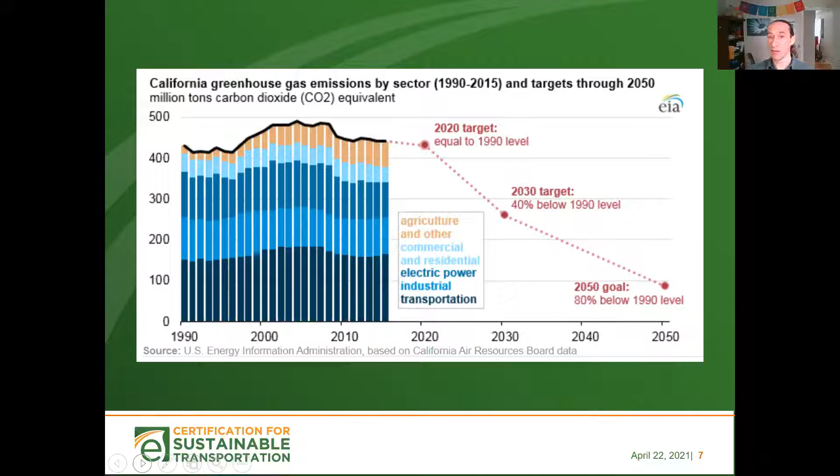California, for better or worse, has very aggressive programs compared to a lot of parts of the world, and compared to the US for sure, for reducing greenhouse gas emissions. And you've got these targets in place, legally. The targets show that 2020 carbon dioxide levels are shooting to be equal to roughly 1990 levels. But then for 2030, 40% below 1990 levels. And by 2050, a goal of 80% below 1990 levels.

To understand how people are going to get there, California's done an analysis of where our greenhouse gas emissions come from. None of these numbers are perfect, but they're pretty good assumptions. 40% of all greenhouse gas emissions in California come from transportation, with about 28% of that coming from light and medium duty passenger transportation and 8% from heavy duty vehicles. Probably about half of that is going to come from private sector motor coaches as well as public transit—heavy duty passenger transportation vehicles.

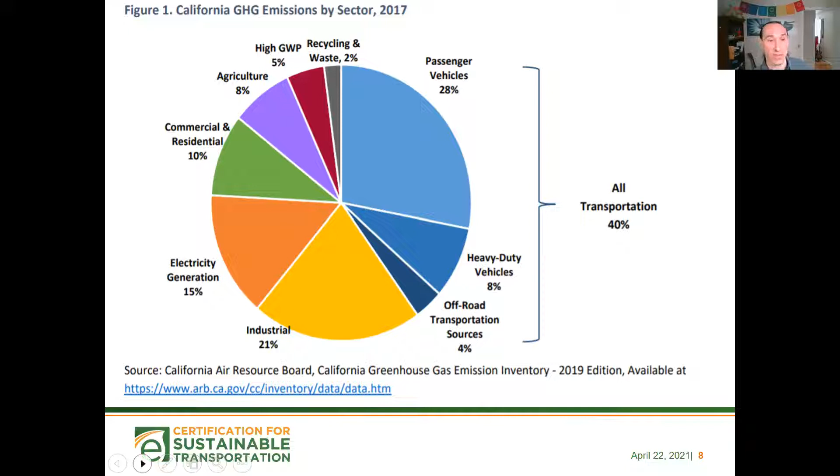The ways folks are looking at improving efficiency per unit of production or consumption for transportation is basically getting people to travel less—avoiding trips, modal shifts. That means getting people, instead of taking their cars, to use a different form of transportation: maybe skateboarding, biking, taking a Lime scooter, or getting on the bus. And I think the real moral of today's story, as we walk through this in a few minutes, is that buses are a really legitimate option that we could defend. The public doesn't necessarily relate buses and green together, but there's a profound connection and a really powerful story to tell about buses being part of the solution, and especially them not being part of the problem.

Having more efficient vehicles and new technologies, and electrification—if we can get that up to scale, with better batteries and charging stations, and the energy coming from clean green sources—that's certainly one way to get there as well, especially if those fuels are carbon neutral or carbon negative, and they're low carbon and energy efficient.

And ways to improve efficiency include reducing congestion on the road. You all know from running bus and motor coach companies, your vehicles get better fuel economy when they're driving down the road versus being stuck in stop and go traffic. So when you have less congestion, your whole system's moving more efficiently. You might have the same number of vehicles on the road, but without that congestion, if you've got good systems, you might boost your efficiency by 10, 15, 20%.

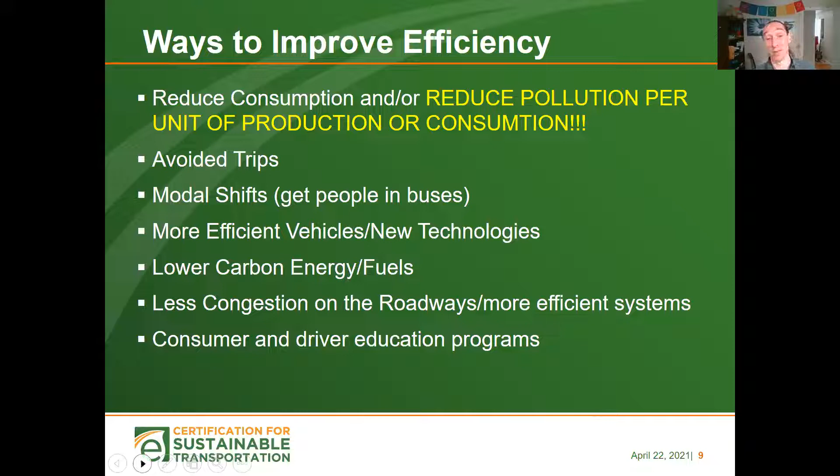California has these aggressive goals, including SB 32's goal of reducing emissions 40% below 1990 levels by 2030. You've got SB 350 and 100, where it says 60% of all electricity from renewable sources by 2030, and 100% carbon-free sources by 2045. That basically means shifting away from coal-burning power plants, if you still get electricity from those, or diesel-burning power plants, and moving towards wind, solar, electric, and other technologies out there. And there's some cool stuff going on with carbon capture, so maybe there will be a way to balance that out in the future.

And you've also got a rule, sustainable transportation planning, SB 375. Now, taking ourselves out of California, you've also got stuff happening nationally and internationally.

And since this is Earth Day and it's global, I figured I'd give a shout out to what's happening on that larger scale. You've got something called the United Nations Framework Convention on Climate Change, that Paris Accord, as controversial as that is in a lot of circles. You've got 190 countries that have made commitments. We know some put it on paper and may not follow through, but we also know other groups are really working hard at following through, and Europe's probably leading the charge on implementing and putting their plans into action.

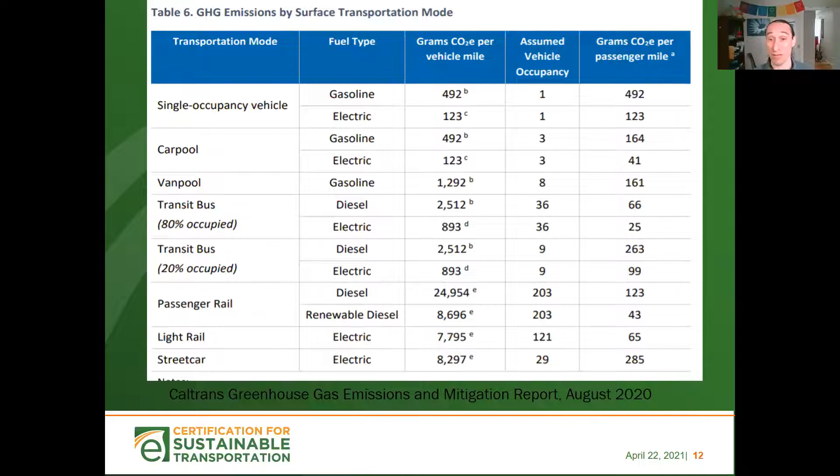If you got a bunch of people in a similar car, you're moving them at 164. An electric vehicle, a single occupancy person in California, these are CARB numbers, it's about 123 grams of CO2 per passenger mile. And if you go down this chart here, you can see different categories, but funny enough, motor coaches aren't listed here.

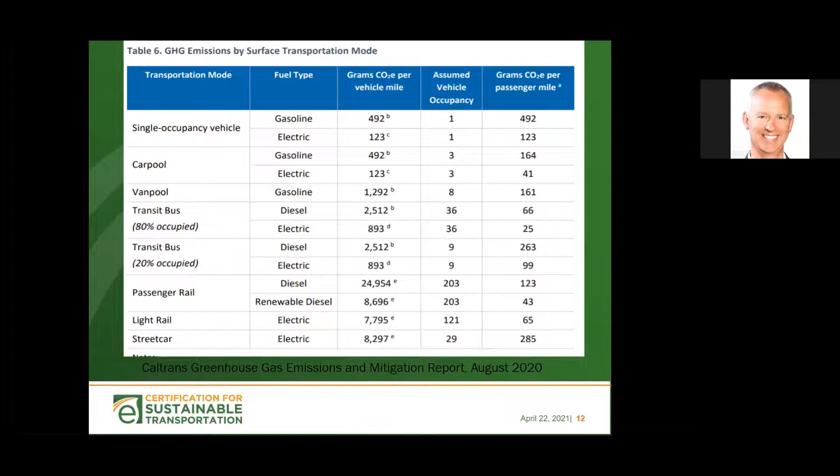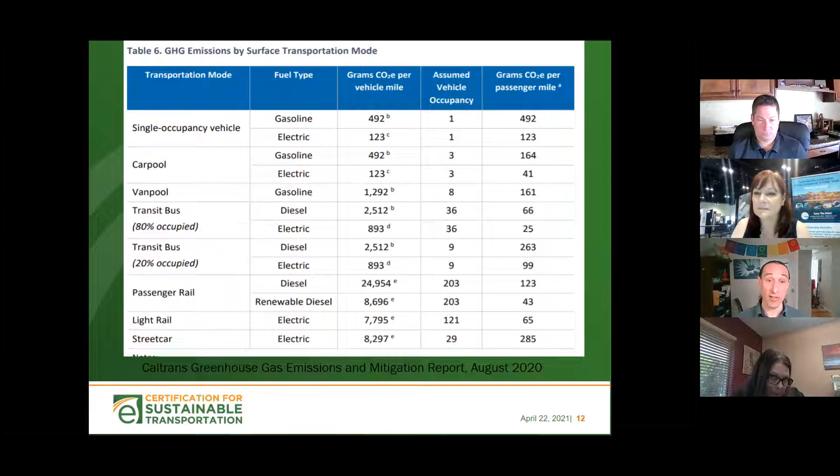You've got an estimate for 80% occupied transit buses. That doesn't happen a ton. In some areas of the country, you get that a lot, but on average, you probably don't. Then you've got estimates here for 20% full, whether you're using diesel or electric, and passenger rail. But buses and motor coaches, it's a big industry, but it's relatively small compared to these folks.

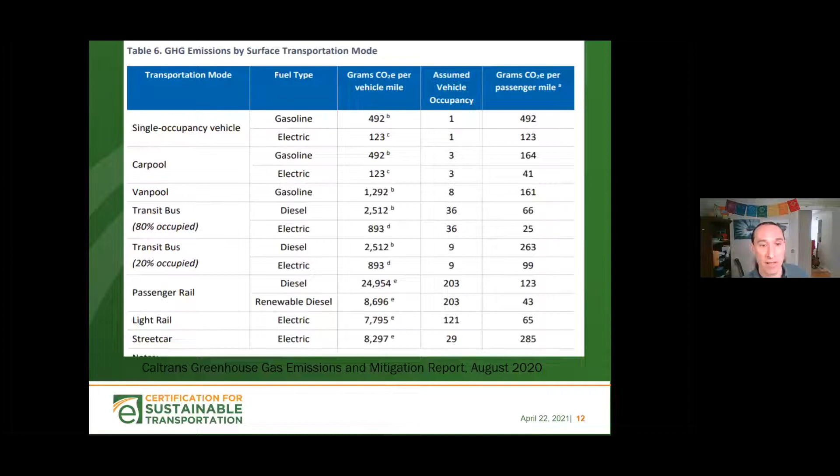And you've never broken these numbers out individually in the state of California. So in trying to figure that out, I wound up doing some math and looking at the average single occupancy vehicle in California in 2017. That was 411 before you take into consideration some other factors. It was really closer to that 490 in the previous slide.

In the US, ground transportation, we move people at an average of 274 grams of CO2 per passenger mile. Sorry if I'm losing folks with numbers and math here, we can get back to any of this stuff if you'd like.

But looking at ABA numbers, when you think about it, you probably have an average of around 40 people on your bus at any moment. You got 55 seats, but it's rarely that you're 100% full all the time. But you're probably not running empty buses. On average, buses and motor coaches, you have around 40 people.

ABA has done the math on this, with the number of people you have in the bus and the average MPG. So let's say your average MPG is about 6 miles a gallon. You multiply your 40 times 6, you get your passenger miles per gallon of fuel.

Now, if you actually do some math on that and calculate how much grams of CO2 are in each gallon of fuel, using the ABA numbers for average passenger miles per gallon, you emit about 38 grams of CO2 for each gallon, for each passenger mile of fuel.

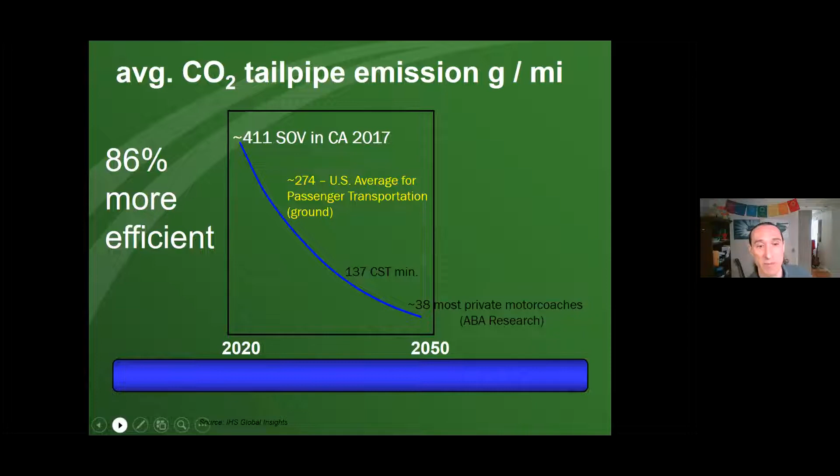Now, if we want to be more specific and actually make comparisons in California to that chart I put up previously, that previous chart actually used a slightly different, what we call emissions factor. It didn't just talk about the fuel being burned out of the tailpipe, it also included something called life cycle cost or downstream costs. That's basically how much carbon do you put in the atmosphere extracting the fuel, transporting the fuel, storing the fuel, getting it into your tanks.

About 51 grams of CO2 equivalent, or greenhouse gases, are released into the atmosphere for every passenger mile traveled in a motor coach. So if motor coaches came up on this chart, you are doing better than every single category except for an 80% full electrified commuter vehicle, transit bus, or renewable diesel passenger rail.

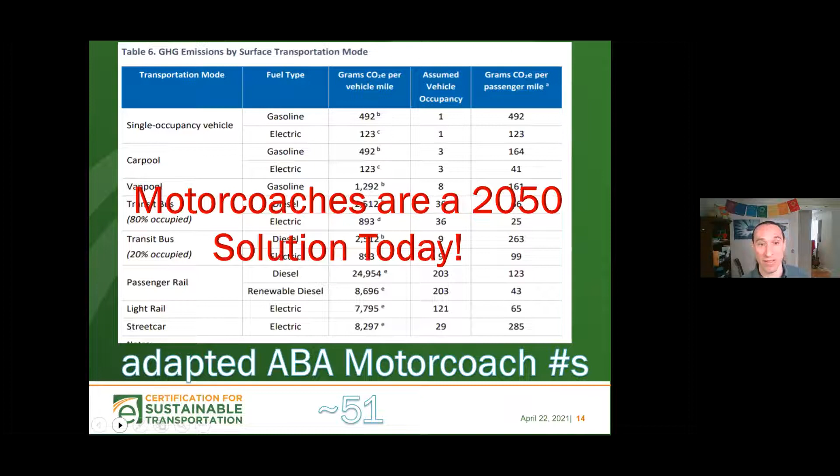Every time, for your company, you're also reducing your greenhouse gas emissions and improving that efficiency. And the more you run fuller buses, the more you're improving that efficiency as well. So this big take-home message that I think is important is, if we're talking about responsible consumption of fuel, or we're worried about oil spills, well, you've got a 2050 solution today in the bus and motor coach sector with what you're doing, with room for growth and improvement.

So I was thinking, when I was talking to Vicky and Chris in previous weeks, well, if we're really looking at the straight bottom line here, I think you in the bus and motor coach industry and CBA, you've got a very good case to make saying, hey, we're making efficient use of oil, and we're doing better right now if you allow us to do what we're doing than these other people are doing with switches.

Motor coaches are affordable and accessible to the most vulnerable and often most marginalized groups, and those are the people that are often affected the most by climate change. You have access in rural areas and urban settings, making it an equitable form of transportation. And if you have a chance on this Earth Day, I would say use it as an opportunity to let your staff, clients, potential clients, and the public know you're part of the solution, not part of the problem necessarily, and work to build momentum and think of creative ideas to do more.

If people are taking into consideration environmental attributes, or how environmentally friendly a form of transportation is for moving a person from one place to another, I think you have a more powerful story than most sectors out there and most technologies, and it's affordable and accessible. And if one day there is that full switch to electricity and electric vehicle technology exists, you'll still be cleaner and greener than the competition, as long as the momentum keeps up and you're not lagging behind.

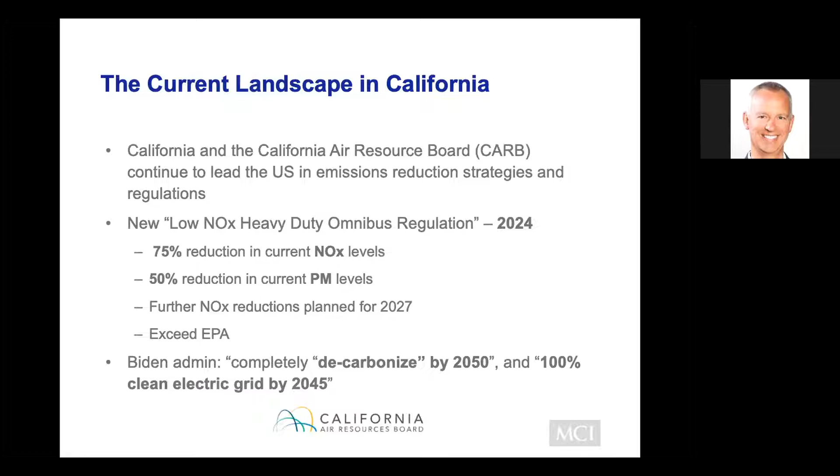Dave, you did a great job introducing us to some of the nitty gritty numbers behind it. I'll add a couple more numbers to it, although it's a little less complicated. Everybody in the audience is very aware of the trek of California and CARB, and how your state continues to lead the construction of strategies and regulations to try and reduce emissions, not just GHGs, but also nitrogen oxides and particulate matter as well.

Just looking in the near future, let's look at 2024, where we have these new low NOx regulations. So 75% reduction from today's levels expected in just 3 years from now, and then another 50% reduction in the particulate matter levels. In addition to this, just 3 years after that, further reductions are fully expected, and all of this exceeds what's going on in the EPA. So great leadership shown here.

And then combine this with the stuff that the Biden administration is saying, talking about decarbonization and cleaning the electric grid, all by the midpoint of this century, as Dave alluded to. So all of this paints a picture of where this is headed. This should be no surprise to everybody, and I think it's great that we have these folks learning more about this and how they go about learning, planning, and eventually procuring and operating.

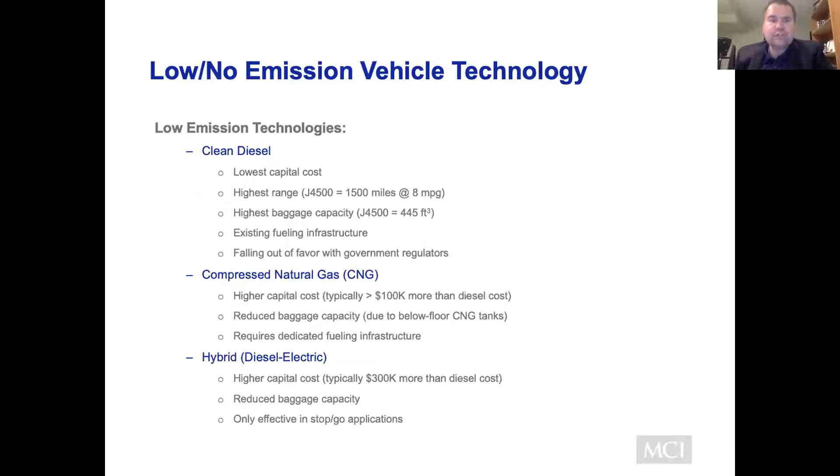Now here's zero emission, the big fish: battery electric and fuel cell. Chris, you were making some comments about the sticker shock you get from buying battery electric versus diesel. It's about twice as much, so you're looking at like $1 million per vehicle. Don't let that scare you too much, because you need to take the longer view in this. You have to think about things like maintenance and fueling costs, which amortize over the entire lifetime of the vehicle. So you have to think about it in terms of total cost of ownership.

As we're getting into battery electric vehicles, we're starting to get more of that data pouring in. In general, you can expect 50% less maintenance costs, and your fueling cost savings totally depends on the price of diesel, the price of electricity, and what you can agree upon with your utility. The more you drive it, the more you save. So you really have to take the long view with that.

Other things that came up during the discussion previously were range and refueling time. These can kind of be quelled by the use of fuel cell technology. Now I'm only going to be talking about battery electric coaches here, but fuel cell does relieve some of the problems that we have with that. Again, it's an even higher capital cost, and the operating expenses for fueling are going to be a little bit more, but really you can operate a fuel cell coach much like a diesel. You get the range, you can probably get a little bit of your baggage space back, and you can stay zero emissions, which is the most important part. Because basically what you do is you have a battery electric coach, but you also have an onboard fuel cell that's constantly recharging the coach.

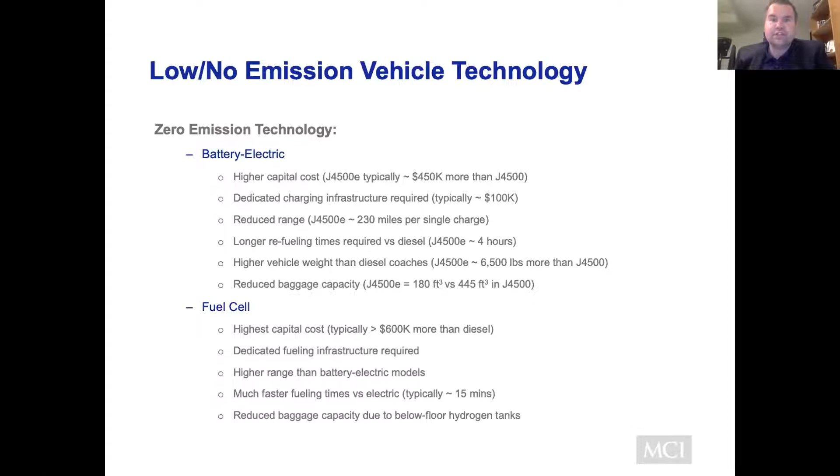And if you source a green source of hydrogen, and as that supply chain becomes cleaner, and we think of the entire life cycle of it, and more infrastructure becomes available, this might be the long-term solution for the entire motor coach sector. So really interesting stuff coming down the pipeline, and lots of different ways of approaching this.

So a little bit more about our group of companies. MCI is part of the NFI group. So really, it's not just coaches. We have tons of different technology to leverage by our sister companies. We build everything from low floor cutaways for the shuttle sector, as well as medium duty buses, heavy duty transit buses with New Flyer, coaches with MCI, and then we've also more recently acquired Alexander Dennis, which builds double deckers. So really, when it comes down to moving lots of people in a heavy duty type atmosphere, we're kind of an all-in-one sort of go-to.

And it's our plans to clean all of these up over time. So just focusing a little bit more on MCI, we are a Winnipeg company. As I mentioned, I am located in Winnipeg. We've been around for almost 90 years now, have a huge American presence, and we are the largest coach manufacturer in North America.

So when you take that together with those technologies that I showed, how do you electrify a motor coach, and how do you electrify this industry, and what are the challenges that are involved? And I think a lot of them have already been covered. It has to do with recharge times and available infrastructure, as well as range. Range is extremely important in your industry. With that said, there are some low-hanging fruit that we can tackle, and that's sort of the market that we've tried to corner.

Things like in the private sector, there's going to be the employee shuttle. So we're talking the Bay Area here, where we have all these big tech companies. They operate within a city limit, or within a metro region, I should say. So that's a good private sector example of shorter distances that are required, but still needing a highway faring coach. Same deal in the public sector with transit agencies that offer commuter type services, all within a metro region. So you're not going city to city or across the state or even across the country.

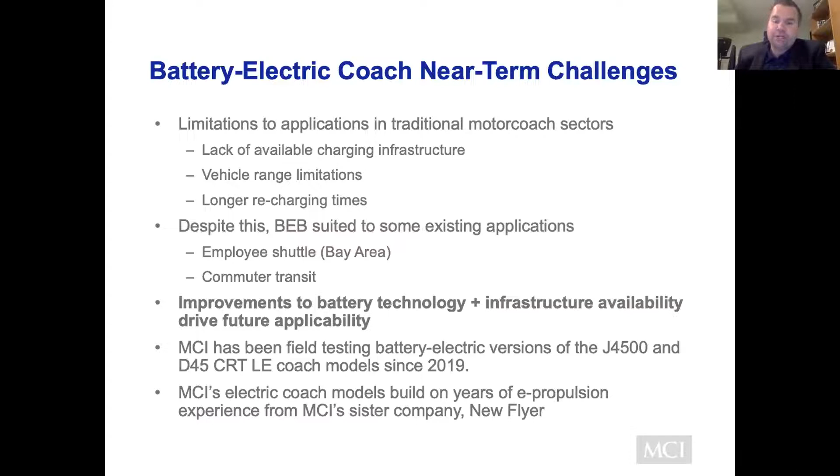And a big thanks of that, or part of that credit goes to the fact that we are part of that NFI group. So we get to leverage all that great technology from our sister company, New Flyer. A little bit more about New Flyer. Again, they are the transit bus manufacturer within our group. They are also a Winnipeg company, and they've also been around for 90 years.

So they're just kind of across town. Yeah, they are the largest transit bus manufacturer in North America. And I'm not going to go through every item here, but they have a pretty impressive resume with regards to adoption of low and zero technologies.

So everything from a trolley bus, they've also done CNG. They were the first to fuel cells, hybrids, battery electric, you name it. So they have lots of proven technology available, and being part of the same group of companies, we've been able to leverage that on our proven motor coach structure.

So with that said, here they are. Here are our currently available battery electric models geared towards our private sector. We have our J4500 Charge. And then for the public sector, we have our D series. This is our CRT LE. The LE stands for low entry. So we actually have a vestibule on board that makes it easier for passengers with mobility issues to enter and exit. So it's not just about electrification, it's about accessibility as well.

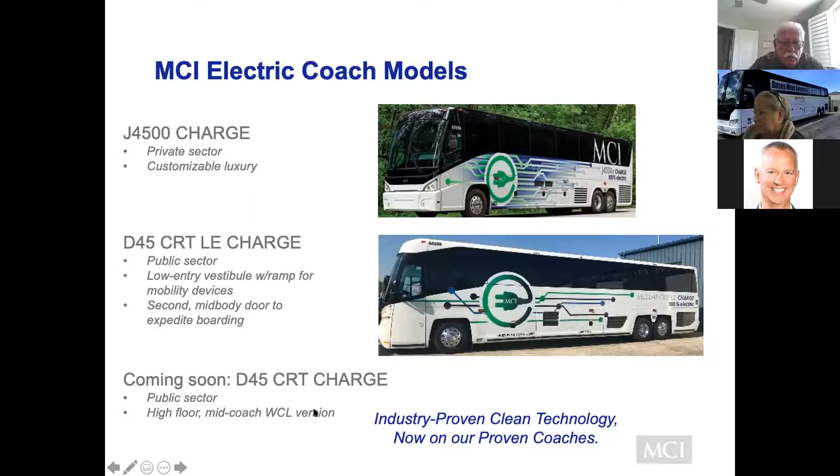So we've tackled that. And then coming soon in just a couple of years, we're going to have an all high floor version of that coach for the public sector as well. So we're really trying to corner as much of that market as we can.

All right, so I'm a technology guy, so I really want to talk about technology and what kind of work goes into electrifying a motor coach.

So I'll show you this massive diagram here. I'm not going to go through every part of it, but I think it's really cool to be able to show off the feat that we have.

Again, we have this proven coach structure that we've been developing for 90 years. Our plan wasn't to reinvent the wheel and start from scratch with a purpose-built item. We wanted that proven coach structure, so we've leveraged the spaces left as soon as you remove the diesel drivetrain. We have power electronics, batteries, accessories, and thermal management systems placed strategically within the rear compartment where we'd normally have the engine, as well as within space where we'd normally have baggage space.

Definitely concerns are heard regarding the loss of baggage space. However, in our J4500 platform, we do still have some, about a third of what we'd normally have. It's definitely a balance between electrification and having available space, and we hope that's remedied over time by better technology.

One example I always like to point out is we actually designed a huge, massive battery pack that's the exact shape of a fuel tank, and we put it in the fuel tank compartment. So it's some really cool engineering going on. Of course we have our electric accessories like an electric HVAC compressor, the traction motor, and the air system is all electrified. What's great is that because it's not belt driven, they have their own independent motors, so they can operate idly without having the engine running, because there is no engine.

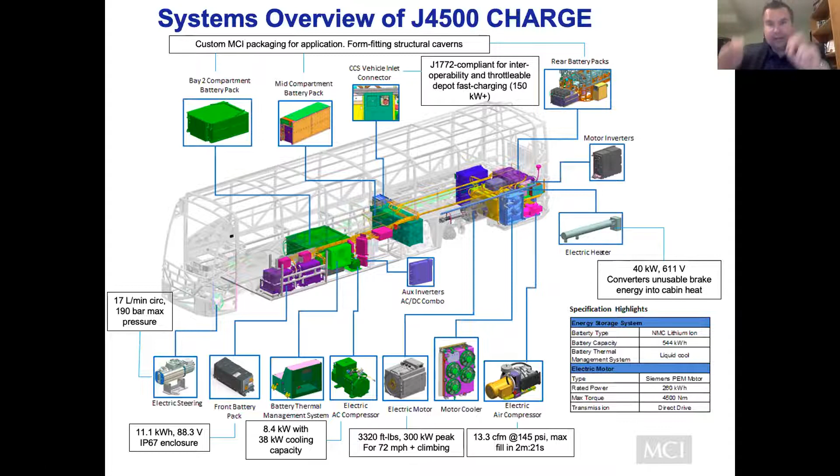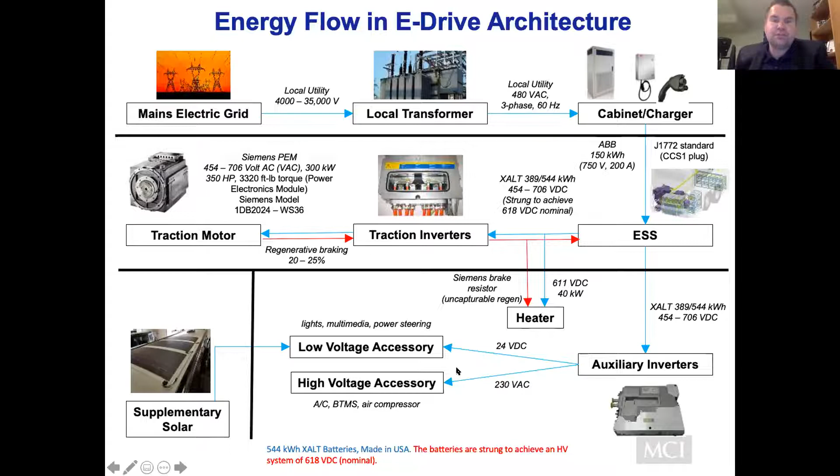We charge our battery system, and then we have a series of inverters and converters that step up and step down the voltage and power level to a usable level to operate things like the traction motor and all of our different accessories, including our low voltage system as well. So really cool energy flow diagram here.

Batteries, this is actually my area of expertise, so I could talk about this all day, but I've tried to condense it as much as I can. We source our batteries currently from a company called XALT Energy. You may or may not have heard of them, but they build all American made batteries. The reason why you probably haven't heard about them is because they're not building batteries for your cell phone or laptop or anything like that. These are for heavy duty applications, so these batteries themselves are actually very purpose built for us.

They adopt NMC type chemistry, which stands for nickel, manganese, cobalt. There were a couple of comments earlier about the need for fast charging as well as high range. It's a little bit more complicated than that, because you usually have to play a game of trade-offs in terms of the abilities of your battery. If you have something that's very energy dense, you usually lose the ability to accept high amounts of power for charging. What's nice about NMC is it gives us a really nice mix of both of those things, along with lifetime, which is important in your TCO arguments, performance, etc. It's a really nice balance chemistry for these types of applications used in a motor coach.

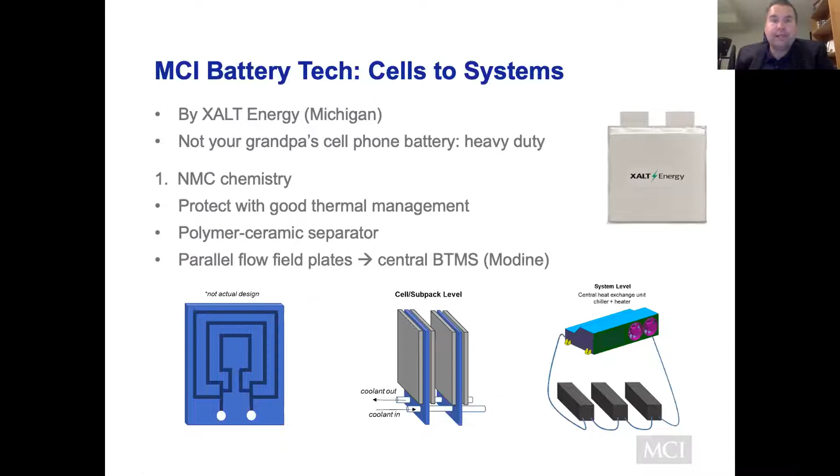As well, we really take seriously our thermal management. What's really interesting about the batteries we use is that they have these patented thermal flow plates that allow coolant to be pumped and face every part of the cell. That means there's not going to be cell failure at any particular part that takes the entire thing out of commission. It's able to control the temperature of each part of the cell, allowing us to maximize its lifetime. The temperature of batteries is the number one determinant for how long they last and how well they perform, and that's why we take it so seriously and have our patented battery thermal management system in place to either cool down or heat up the batteries in cold weather and keep them happy.

Taking it a step further, building them into packs.

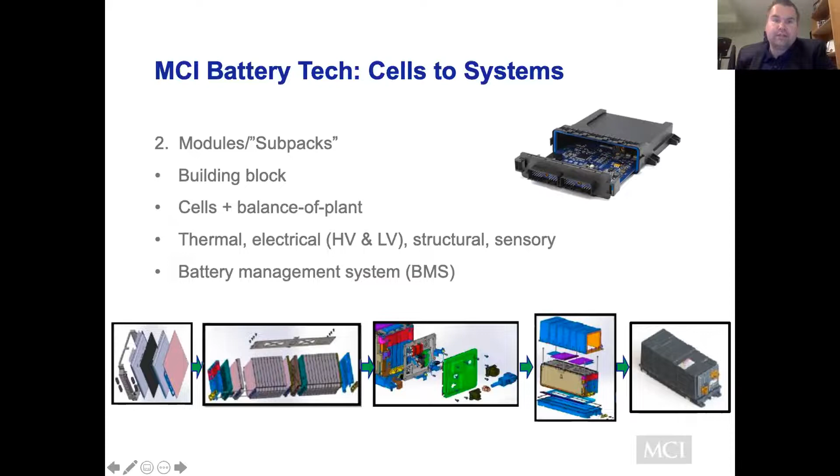And so we have the cells themselves, and we add the balance of plant: thermal flow plates, a battery management system, sensors and everything like that. So it becomes a living, breathing organism that's constantly self-aware, having the battery health monitored, temperature monitored, voltage measured. Everything comes back to a central computer that acts like a central brain for managing the batteries. And so what we come up with are these building block sub packs that almost act like Lego blocks and are extremely modular to be placed on the bus as needed.

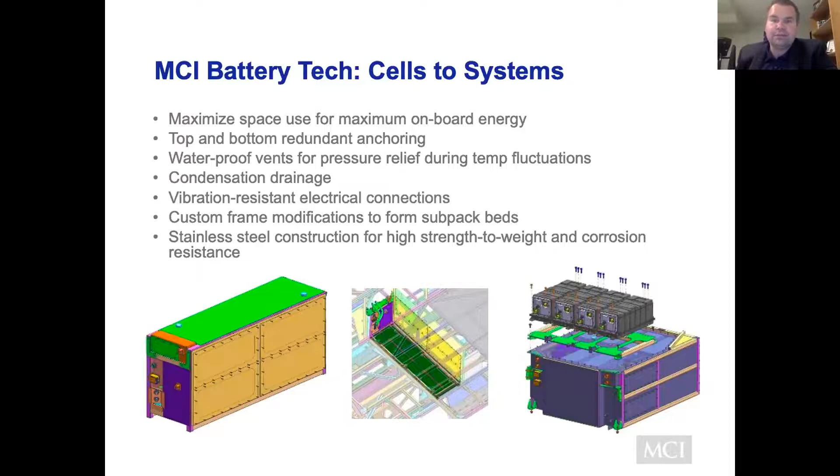And then finally, up at the high end of the hierarchy are the actual packs themselves. This is the integration of those sub packs that I showed. This is really where MCI steps in and uses our 90 years of engineering to make this possible, putting them into packs that fit within our proven coach structure, using stainless steel so we get good strength to weight and lower possibility of corrosion. We also include things like drainage and vents. So we really have a plug and play system here that we can string together in parallel and get the energy level up to a usable amount of kilowatt hours to extend our range.

Speaking of, everyone always asks, what kind of range do we actually get from batteries? And we always need to give this disclaimer first, that it depends - and that's not really a fun answer, but it's really important to understand the determinants of range: things like the amount of HVAC use, since you don't get free heat from the engine anymore, the number of passengers you have, how hilly the topography is that you're operating on. All of these will give you a pretty wide range of ranges, and I'm going to show you some numbers that show that. But in general, one take-home number, and anybody who's new to the industry might want to get familiar with the idea of using kilowatt hours per mile.

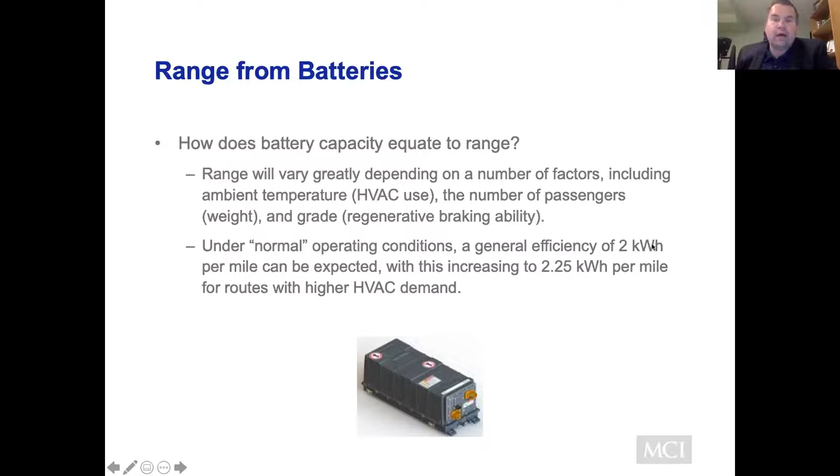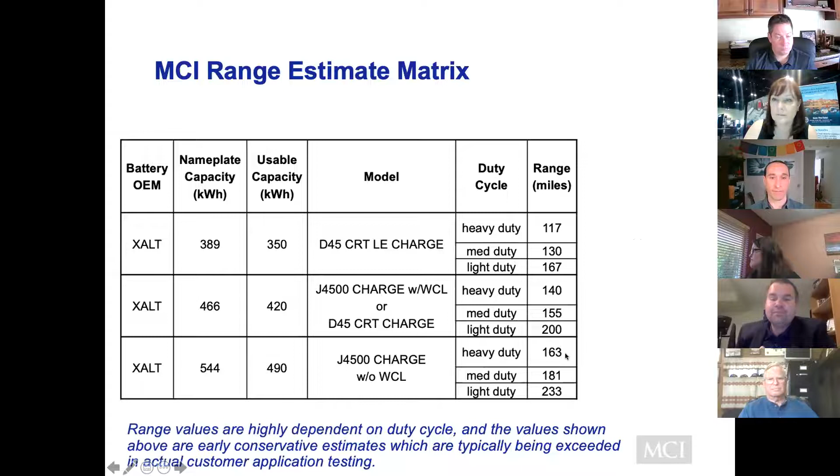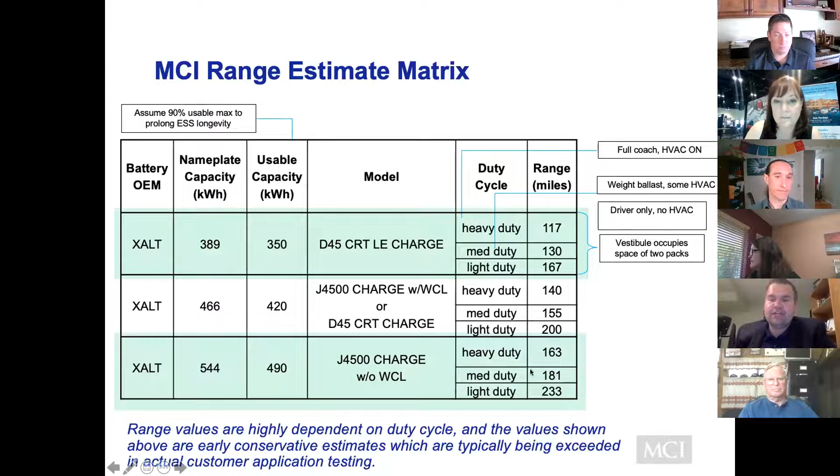It's a lot like MPG, and this gives us an idea of the efficiency or consumption of the vehicle and how much energy it uses to travel a mile. We like to stick around in this 2 kilowatt hour per mile area. Here's some examples - try and pay attention to this bottom row. This is for our J4500 with our max battery capacity of 544 kilowatt hours. You can see that the range we get - I like to call it the range of ranges, because you get such a wide window - is anywhere from only 163 miles up to about 233 miles, which is pretty respectable. But all of this comes down to those factors. In a heavy duty type application, for example, you'll have the HVAC pumping in full, a full load of people, and you might be doing a lot of hill climbing, maybe all hill one way, and then the reverse trip is a lot better because you have regenerative braking going down. But this is just to give you an idea of the types of ranges we can achieve and how dependent it is on different factors.

Michael, it's Vicki. I don't know if you have seen this, but Ginny Orr has a question. She asks, what's the average climate temperature which these batteries have been tested in for in-coach use? Could you address that?

Oh yeah, absolutely, that's a really good question. We've been in Southern California, and we've been throughout Northern Alberta and Canada, so we have a very wide range of temperatures. It's been operating in as low as the minus 30s, and at or around 100 degrees Fahrenheit - so a very, very wide range. A lot of that comes down to that battery thermal management system I was talking about. No matter what the temperature is like outside, we're always keeping the batteries happy with that system, because if it's really hot out, we'll cool down the coolant, pump that into the batteries, keep them cooler, and keep them within that optimum temperature range of around 25 degrees Celsius - about room temperature, high 60s sort of area. So it's a very wide range of operating environments.

So how do we get that sort of data on range?

Now I want to talk about this really cool onboard technology that makes the vehicle really smart. This is technology we've adopted from New Flyer, who implemented it on their transit buses, and it's especially important for fleets. You're probably familiar with telematics used to monitor where everybody is, but we take it to the next level with our MCI Connect system.

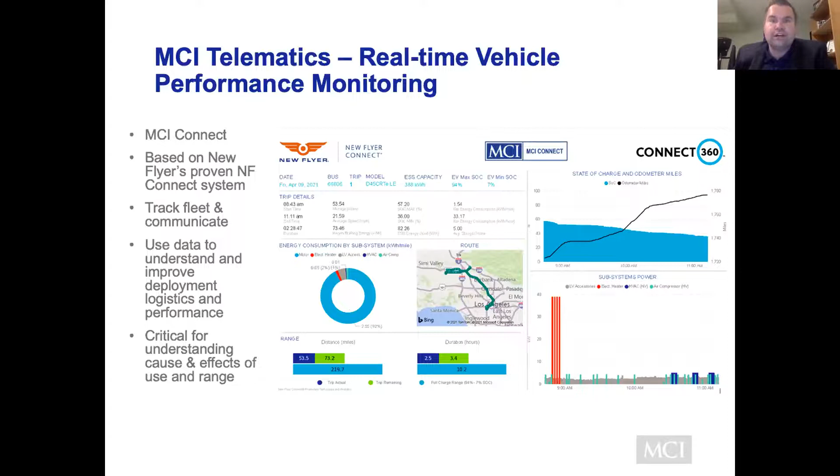Here you can actually see where power consumption is happening. In a report you can generate after a trip, you get a pie chart showing that X amount of your battery consumption went to the traction motor for propulsion, X went to an electric heater, and a certain amount went to the air system. You can map this out, and if you become a data-driven fleet and pay good attention to it, this is your avenue to making a lot of efficiency savings, which will save you money down the road and let you operate a more efficient fleet. Really important stuff for electric vehicles, where you do care about where your energy is going.

So let's switch gears a little bit, and I'll take the last third or so to talk about how you charge these things and what you do when you need a lot of chargers.

First, our general approach to charging an electric coach is a simple plug-in, or as it's often known in the industry, a depot style charger, where you have a depot base with these chargers installed. They have a special plug, and we have a special outlet right on our coach that you plug it into. This is a DC direct current fast charger. The plug type is called CCS1, included with the interoperability standard we follow called J1772. This means it isn't a charger designed to operate just MCI coaches or anything like that.

What we've done is get at the table with plenty of other competitors and sat down and came up with a standard, saying, if we're going to brand ourselves J1772, we're going to be charger agnostic, and may the best manufacturer of both charger and vehicle win. This is the industry playing ball in the name of getting electric coach adoption to come up, because we just have to follow a standard, and you can plug into various chargers manufactured by different companies that all follow that same standard.

Same goes for the coach side. Our coaches charge at a max rate of 150 kilowatts with our 200 amp electrical architecture, which means we can take that hefty 544 kilowatt hour system and charge it to full from basically zero in under 4 hours. This, of course, depends on how many batteries you have on it. Again, 544 is considered a lot, and we're still under that 4 hour mark.

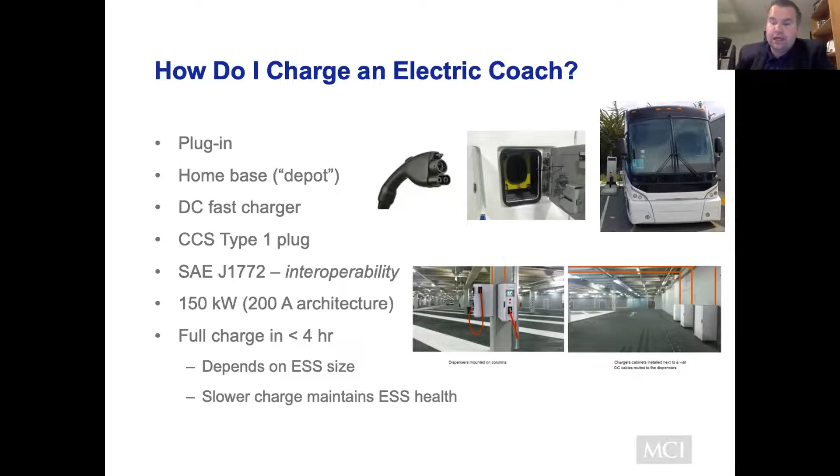One feature we like to tout is that this depot charging, slower charging approach is really good for the batteries, because it keeps them at their happy and healthy temperature. You're not forcing amperage through them very quickly like you might with a fast charge type of system. So this makes your battery system last as long as possible, which is important for cost.

So now what do you do at the fleet level? The New Flyer experience in the transit bus area - they spent so much time developing their electric bus, and there was so much interest from transit agencies saying, we really love your bus, but we want a turnkey system. We don't want to source our own chargers and figure out where they plug in, how that's going to work, or redesign our garage. This forced New Flyer to come up with a full suite solution called New Flyer Infrastructure Solutions.

It was introduced just over 2 years ago, at the beginning of 2019, and it's a full suite service for start to finish of projects. It handles everything but the bus, and it's all about the chargers - all about the work that needs to be done to make your site ready for electrification. MCI, being part of the New Flyer group, means that because we're friends, we get to utilize this service and leverage that expertise. For them, it all starts with knowing the right questions to ask.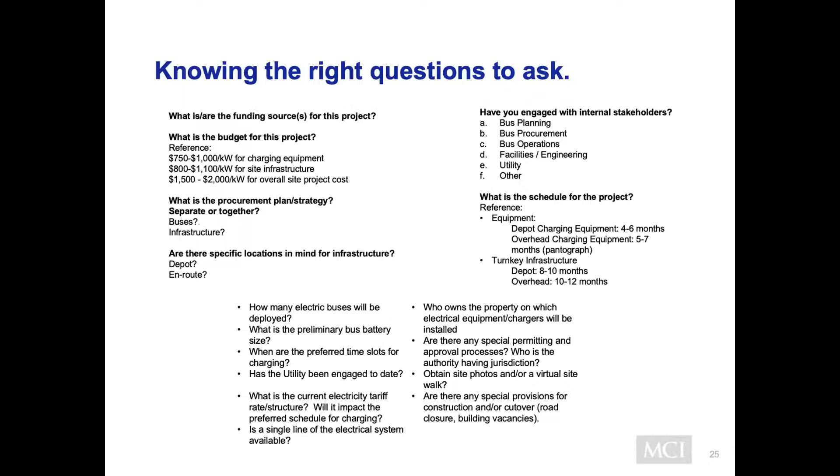As the operator, you're going to have plenty of questions like, how many chargers do I need? Where do they go? What do I need to do with my utility? They know these exact questions and how to go about answering them, and that's really what you're getting, at least to begin with.

It includes every part or every stakeholder you can imagine. It's not just about the chargers themselves. Certainly they'll be interfacing with those suppliers, but also with your existing facilities, imagining what your facilities might look like using their architecture and engineering team, working with the operators themselves, as well as with the utilities. They know the right questions to ask your utility to get the right amount of power, and power at a competitive price as well.

So going through these in a bit more detail: this will include master planning of your facility, whether you need something purpose-built or to retrofit your existing one. We have access to energy management software so that you're charging at off-peak times as much as possible to reduce your charge.

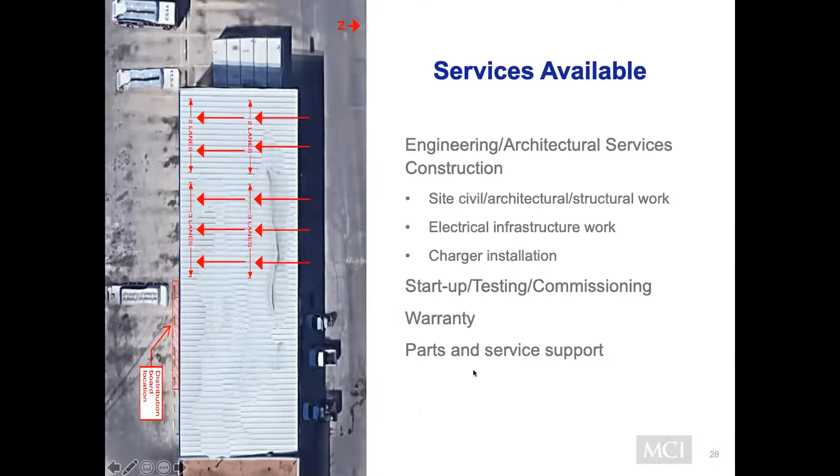Actually procuring all of your chargers themselves and handling the construction and project management of the entire thing. We have experts working for New Flyer, a bus manufacturer, who are experts in construction. So we put together a really unique team of folks - everything civil, any electrical make-ready work, and then the actual charger installation at the end, commissioning, starting you up, getting you ready to operate your first ZEB fleet, and even on the back end with a warranty and parts and service support. So it really is a full suite service we can leverage.

I wanted to show you this really cool slide. This is an example, a case study of a site visit we did with Houston Metro. I was lucky enough to be part of the team that went there, although I don't think I helped out too much. What I wanted to illustrate is that after just a couple hours walking around their site, this is what the folks on that team are able to imagine - a really creative bunch. They'll see the available facility and space you have, and imagine and render what that might look like with the right amount of chargers for the procurement they're imagining.

So really, really cool - this is just a preliminary report. They obviously get into a lot more detail as you go further with them. You don't need to do the full start-to-finish commissioning type of contracting with them. You can do bits and pieces, fill it out as needed, and they can fill in the remainder. So it's an extremely modular type of program that they put out.